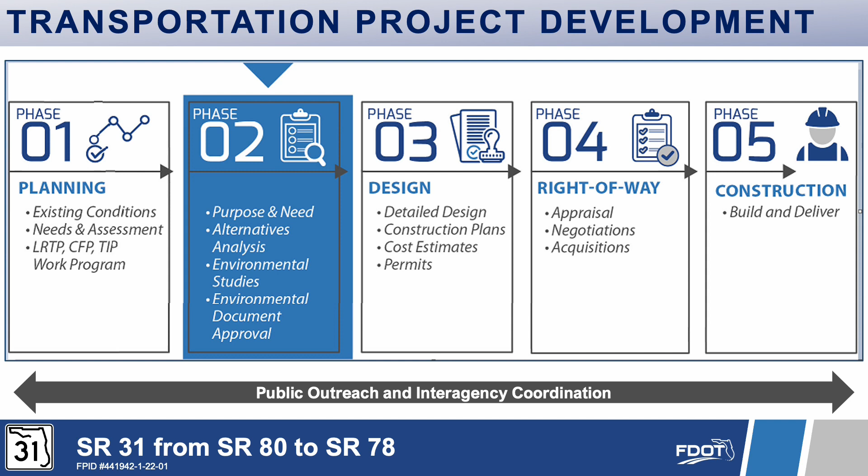The purpose of this PD&E study is to evaluate engineering and environmental data and document information that will aid FDOT District 1 and the FDOT Office of Environmental Management in determining the type, preliminary design, and location of the proposed improvements. The PD&E study is part of the transportation project development process and includes environmental review and compliance with federal and state laws and regulations so that a project can advance into final design, right-of-way, and construction.

The project is in northeastern Lee County. The study begins at State Road 80, or Palm Beach Boulevard, and extends approximately 1.4 miles north to State Road 78, or Bayshore Road. The project includes replacing the Wilson-Pigott Bridge over the Caloosahatchee River and improvements to the State Road 31, State Road 80 intersection.

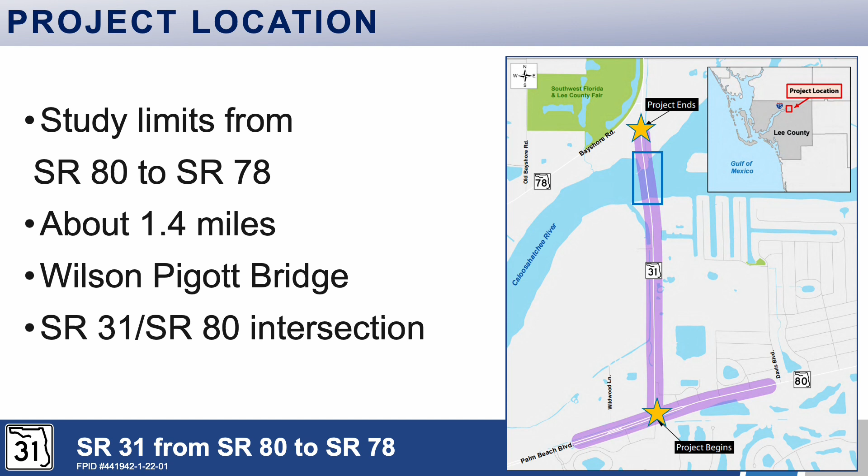The project purpose is to address capacity and transportation demand in the project study area, address substandard elements of the Wilson-Pigott Bridge, enhance linkage and regional connectivity in the area-wide transportation network, and enhance safety for hurricane evacuation and response times.

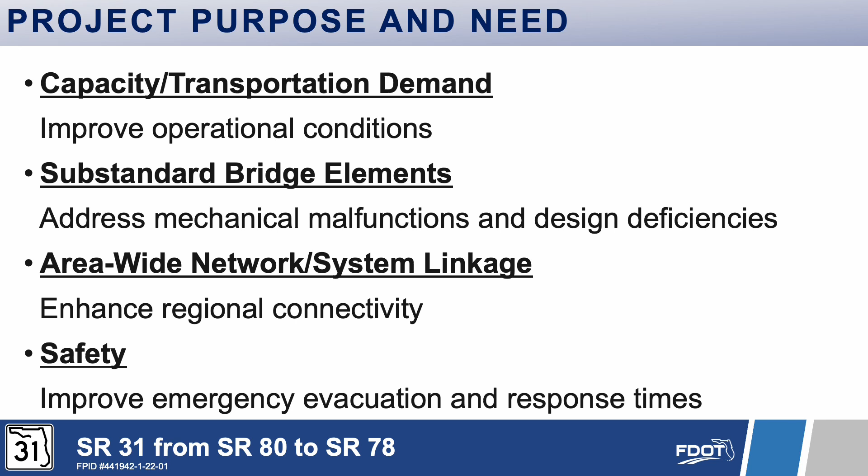The need for the proposed improvements for State Road 31 is predicated on existing and projected conditions, including the tremendous growth projected for Lee County. Current traffic volumes of 15,900 vehicles per day are predicted to increase to volumes that would approach or exceed the typical maximum volumes for a two-lane arterial, resulting in increased congestion in the future.

Due to its proximity to Interstate 75 and other destinations, the area is transitioning from agricultural and rural uses to suburban, including Babcock Ranch. Retail and commercial market activity has followed the area's residential growth. The area continues to experience substantial growth, which will further increase traffic and strain the corridor's capacity, resulting in more congestion and poor level of service, including at the State Road 31, State Road 80 intersection. In addition to the traffic growth, State Road 31 currently does not provide accommodations for pedestrians and bicyclists.

Improving the capacity of the roadway and maintaining the functionality of the bridge is important due to other special designations and functions. State Road 31 is a designated highway corridor of Florida's Emerging Strategic Intermodal System, SIS, and a Tier 1 freight corridor of Lee County, with about 25% of existing traffic along the roadway composed of trucks. SIS facilities are those that are critical for regional and statewide movement of people and goods.

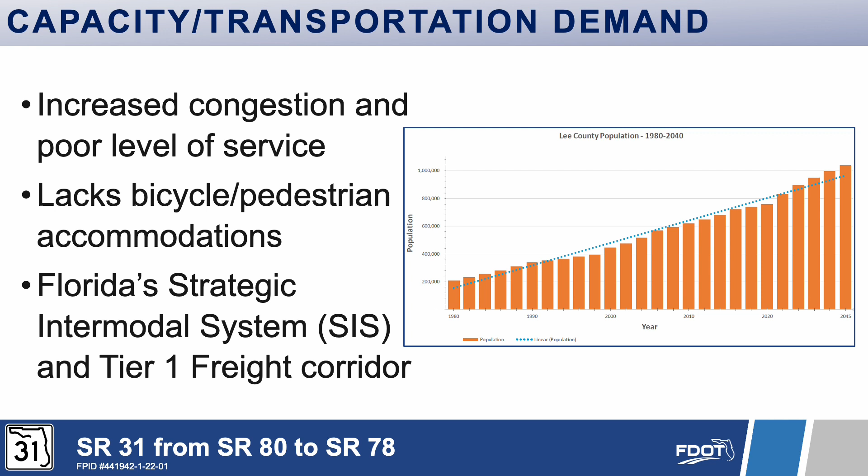The Wilson-Pigott Bridge was constructed in 1960 with a 50-year service life. Major rehabilitations were completed for the bridge since it was built. The bridge has a low sufficiency rating, which is a rating of a bridge's fitness to remain in service. The bridge also experiences frequent mechanical malfunctions, leaving the bascule span in the up position, which disrupts traffic flow and circulation in the area. The bridge also has substandard design elements.

Among other things, the bridge has narrow travel lanes and shoulders and does not adequately accommodate non-vehicular travelers, such as pedestrians and bicyclists. The bridge does not meet current U.S. Coast Guard standards for horizontal clearance. Movable bridges present maintenance costs.

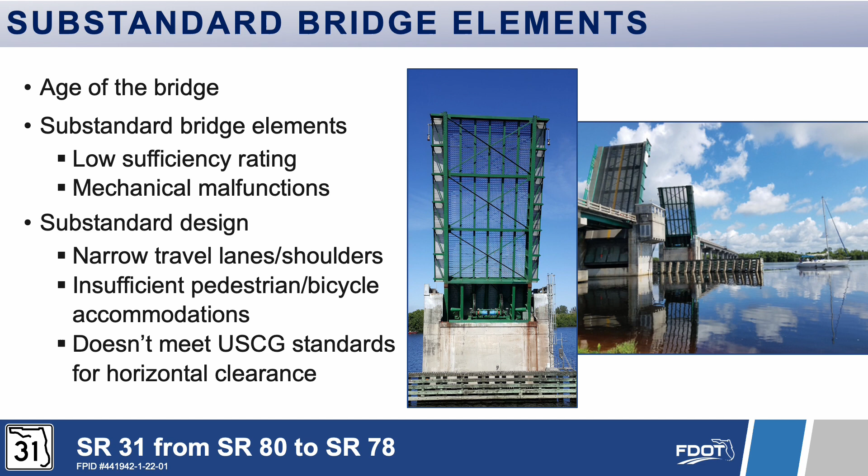State Road 31 is used to access services and activity centers within and around the project study area. And these growing activity centers have become notable traffic generators for commuters. Capacity and operational improvements within the project study area would enhance regional connectivity, would allow State Road 31 to function as a regional corridor, and provide a viable north-south alternate route to Interstate 75.

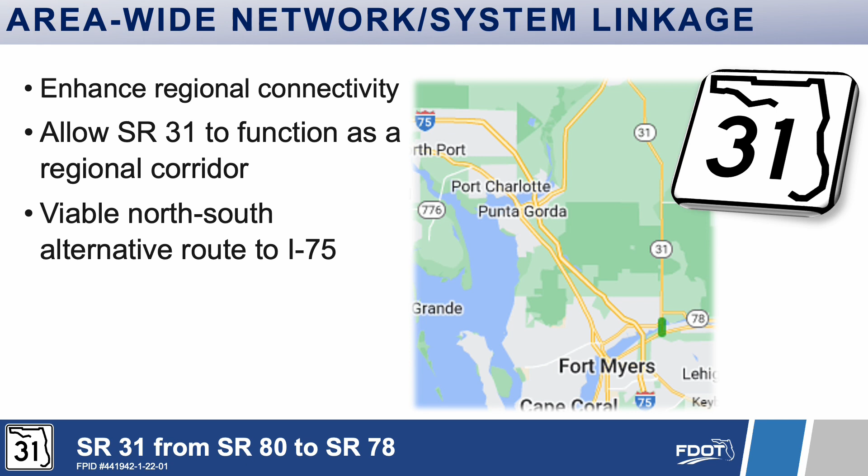State Road 31 plays a critical role in facilitating traffic during emergency evacuation periods as one of the 7 crossings over the Caloosahatchee River within Lee County. Improving the capacity and operations of the corridor, including the bridge, will enhance emergency evacuation efforts and lead to improved evacuation and response times.

The proposed improvement would consist of widening the 2-lane roadway to 6 lanes and, as shown in the proposed typical section, includes 3 11-foot lanes in each direction, curb and gutter, a 22-foot raised median, and 12-foot shared use paths on both sides to accommodate pedestrians and bicyclists. The project would require the acquisition of additional right-of-way for roadway improvements and drainage. The proposed posted speed limit is 45 miles per hour.

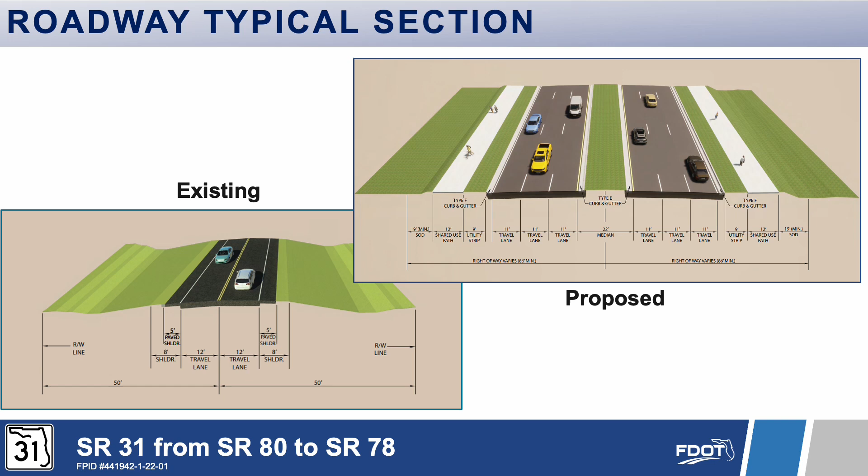The Wilson-Pigott Bridge currently has 2 10-foot lanes, 4-foot shoulders, and 3.5-foot sidewalks on both sides with no separation from motor vehicles. The existing vertical clearance over the channel is 21 feet. FDOT is evaluating 2 options for the Wilson-Pigott Bridge replacement.

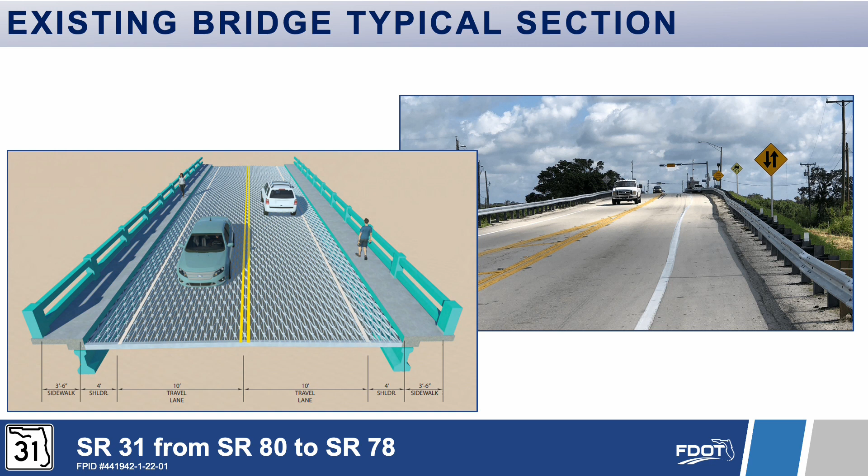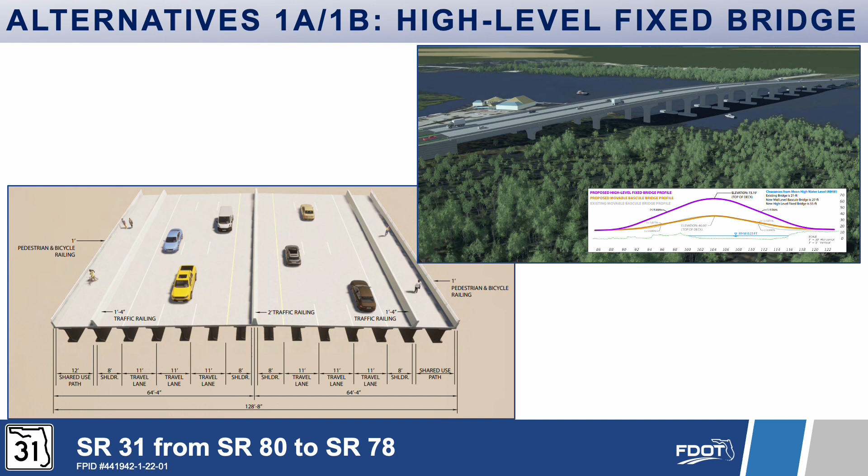Alternatives 2A and 2B include a movable bridge option. This option has the same typical section for the travel lane and shoulders as the fixed bridge alternative, but includes a 13-foot raised median outside of the movable portion of the bridge. As with Alternative 1, pedestrians and bicyclists would be protected via a raised barrier and railing. As with today's bridge, this bridge would pause traffic movement over the bridge to allow boat passage.

As shown in the rendering and indicated with an orange line, the minimum vertical clearance over the channel for this bridge alternative is 27 feet, which is 6 feet higher than the existing bridge.

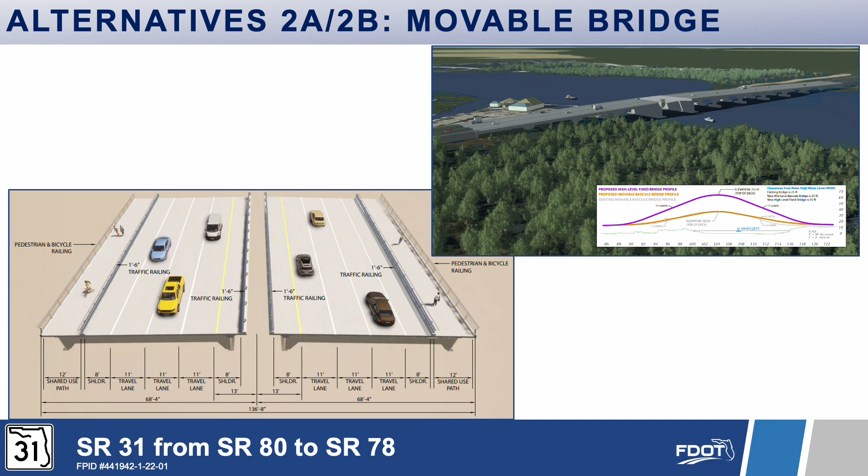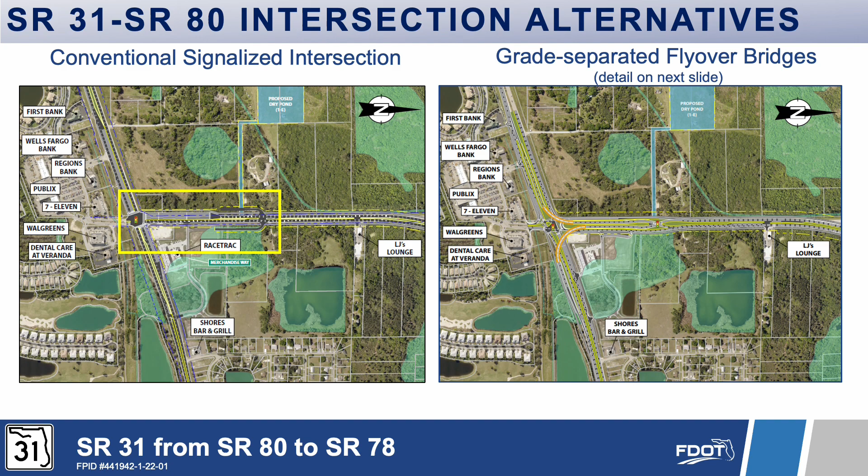FDOT is also evaluating 2 configuration options for the State Road 31 and State Road 80 intersection. The development of these followed the Intersection Control Evaluation, or ICE process, which evaluates alternatives based on operations, safety, cost, and social, environmental, and economic impacts. The first option, shown on the left, is an at-grade conventional signalized intersection. The second option, shown on the right, is the flyover option.

The at-grade conventional signalized intersection option on the left is enlarged on this slide. As shown here in more detail, the conventional intersection would require the addition of multiple turn lanes to handle heavy turning movements to and from State Road 31 and State Road 80.

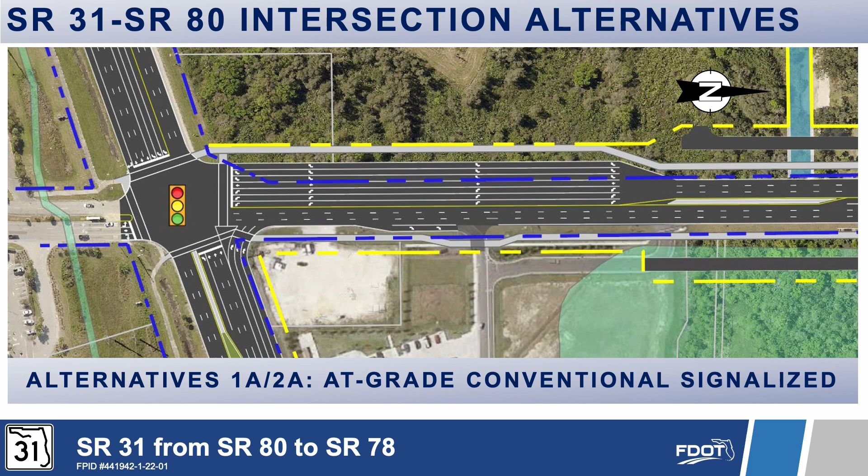The flyover option is illustrated on the next slide. As shown in more detail here, the grade separation flyover alternative would introduce two new flyover bridges for State Road 31 and State Road 80 movements. Southbound State Road 31 travelers, such as those coming from Lee Civic Center or Babcock Ranch, who want to go eastbound on State Road 80, would use the flyover bridge. These travelers coming from the north will cross over at the proposed signal on State Road 31.

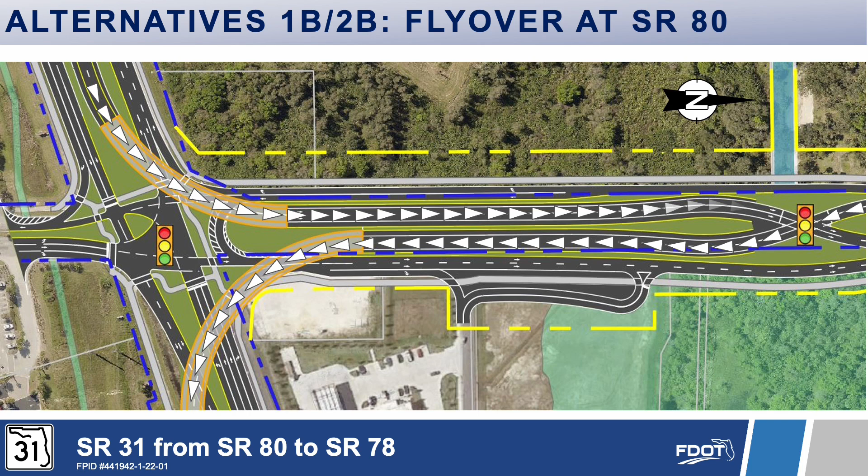Similarly, eastbound State Road 80 travelers, including those coming from Fort Myers who want to go northbound on State Road 31, would use the flyover bridge. These travelers will cross over at the proposed signal on State Road 31. Throughout this study, a no-build alternative is also considered. The no-build alternative assumes that no improvements are made to State Road 31 through the year 2045, except routine maintenance.

This PD&E study is ongoing. Project team members will continue to develop, refine, and evaluate alignment alternatives for State Road 31 throughout the remainder of the study. Potential environmental effects associated with the proposed build alternatives are under careful evaluation and include detailed studies of sociocultural, wetlands, floodplains, protected species and habitat, water quality, contamination sites, recreational sites, noise, air quality, historic structures, and archaeological sites. Based on data and studies conducted to date, FDOT does not anticipate significant effects associated with these proposed build alternatives.

The evaluation matrix included in your handout shows a summary of results of preliminary analysis for the build and no-build alternatives. This matrix is also on display this evening. The purpose of this alternatives public meeting is to provide you the opportunity to ask questions and offer comments about the proposed alternatives under consideration. FDOT is also asking local governments and regulatory agencies to provide comments about the project. Detailed mapping of the roadway improvement and bridge and intersection alternatives are provided. Please view the display boards, ask questions, and provide feedback. Your comments will help the department make its selection of the preferred alternative.

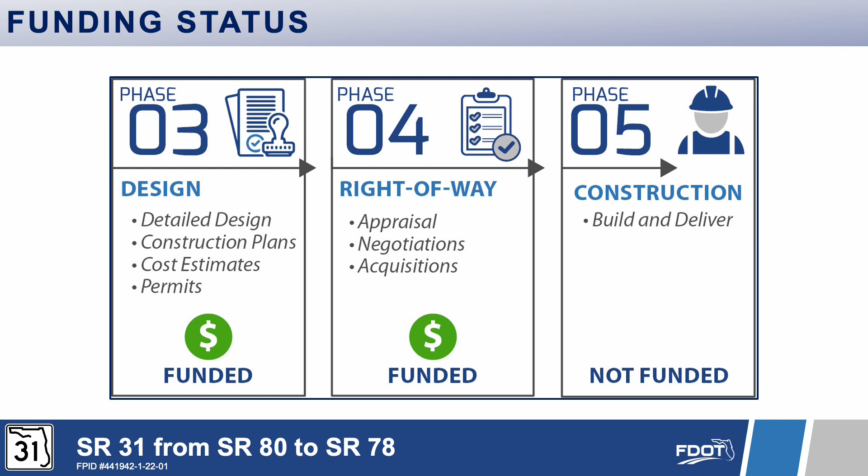The department anticipates completion of this PD&E study by March 2024, when the FDOT Office of Environmental Management accepts the location and design concept of the preferred alternative. Preliminary design is underway and is part of this PD&E study. The right-of-way phase is funded. Construction is not funded at this time. Again, the State Road 31 study team is here tonight to answer your questions and discuss the project. We invite you to speak with them and to review the aerial maps, plans, and illustrations on display.

This PD&E study is being conducted and completed according to the requirements of the National Environmental Policy Act and other related federal and state laws, rules, and regulations, which will qualify future phases of this project for federal funding. For additional information and all rules and regulations this meeting follows, please see the Federal and State Requirements Board.